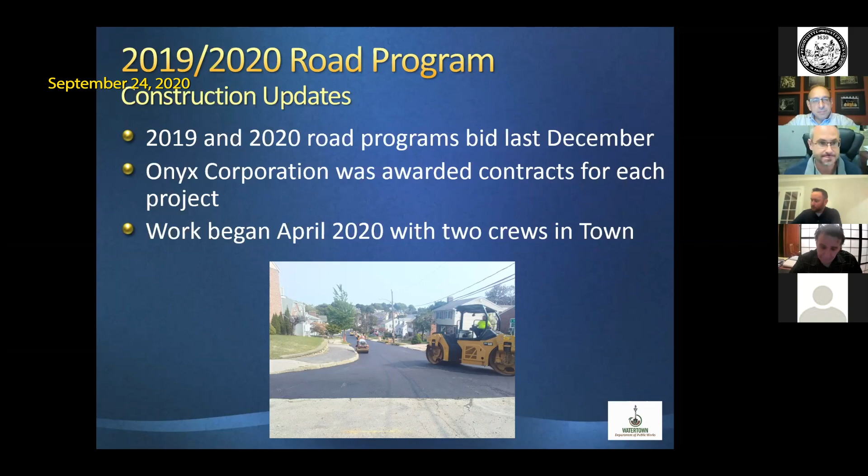Work began in the middle of the fray in April when everything was a little hectic, but they have had two crews in town working consistently since then. I'm going to go through just a brief update. I won't go through every street individually, but I've listed here the streets that are completed: Avon Road, Chandler Street, Burnham Street, Bridgham Ave, Piermont Street, Tappan Ave, and Bartlett Street. I do want to point out that even though I'm saying they're completed, you should consider them, say, 99% complete, or essentially substantially complete.

There are items that still need to get done. There will be some line painting that goes in, say, stop bars or crosswalks. Tree plantings will be done in the fall. And there might be, as there are on any project, some items that maybe fell through the cracks or didn't get addressed. So the town will go through with the contractor, walk the sites, and look at any deficiencies or defects that need to be addressed, which is called a punch list. But essentially, these streets have been completed to date.

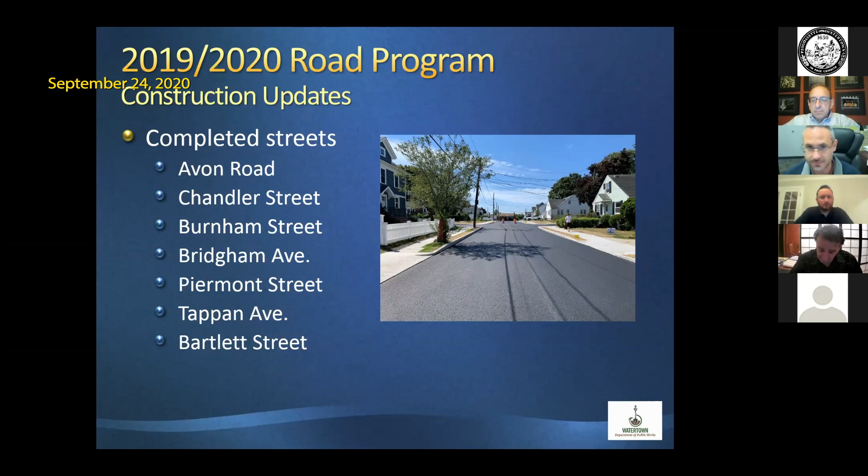We have two streets going on concurrently right now with our two crews. We have Bellevue Road going on and Kimball Road going on as well. They both have curb and sidewalks going in at the same time.

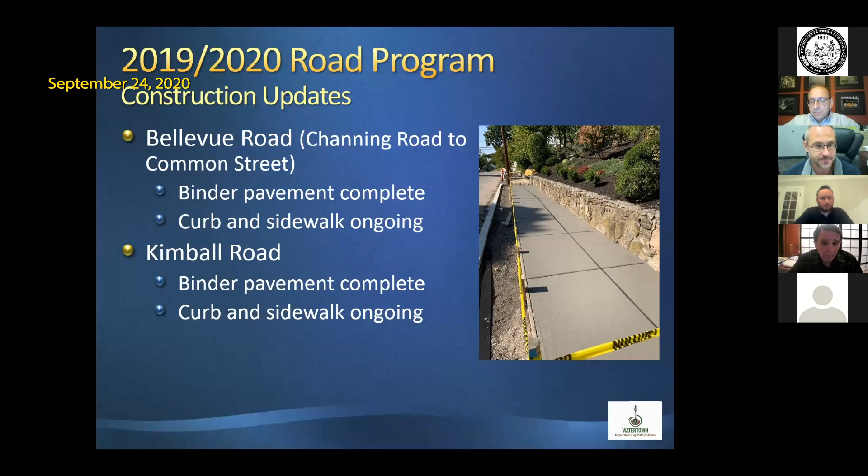The roads that you've probably recently seen have been brought to binder grade. They've had the reclamation process done and put in the first coat of asphalt are Frank and Louise Street, Nichols Ave, and Downey Street. I'm being very conservative in what I'm putting out here because I don't want to make promises that don't happen, but I will say that the contractor is very interested in getting all of these streets completed this year.

That said, we are entering into October. We've had an unseasonably dry season, which has allowed us to continue to work. If we have issues with rain, weather delays, and other things, they may not be able to get to all of these streets. Right now, the next street they plan on going to is Frank and Louise Street. They'll probably be there probably second, third week of October as one of the crews finishes up on Kimball and Bellevue.

When the next crew finishes up, we'll evaluate how much time we have left and decide whether to go to Nichols Ave or Downey Street. Nichols Ave is a little bit more intensive, a longer street with more work to do. Provided we continue to have good weather and a mild fall, they plan to keep going as long as they can, and there's the potential for Downey Street to get completed this year.

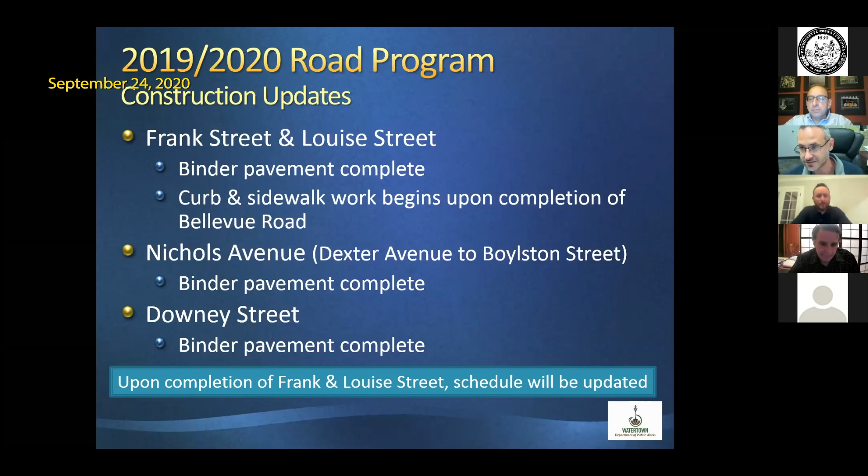Also, the council may be aware that on a weekly basis we've been updating the homepage of our DPW webpage with a little bit more detailed information about the work that's going to go forward. And of course that supplements any resident notifications that go out per our typical process.

Wheeler Lane, we've had a little bit of a delay with Wheeler Lane this year. We got into a rather complicated gas main project on Riverside Street and Wheeler Lane that have impacted some sewer work and our ability to proceed. But the contractor is still willing and interested in doing Wheeler Lane. It will be done in the spring, and this is consistent with the past couple of years where we start a project with multiple streets and sometimes carry over to the next year to finish up.

I'd like to take this opportunity to highlight some of the work that we do, and particularly how it ties in with some of the other town council priorities and objectives. So I'm going to talk a little bit about green streets and complete streets.

Some of you are familiar with our green streets from our Edenfield Ave project a couple of years ago. That was fairly successful in terms of managing stormwater and providing enhanced stormwater quality improvements, reducing the amount of stormwater in our systems through stormwater tree trenches. I don't have the final installed picture here, but you can see on the right a picture of a tree trench being installed. You'll see the concrete structure being the catch basin, and the little white pipe with holes in it, surrounded by crushed stone, is the pipe that allows the water to percolate into the soil.

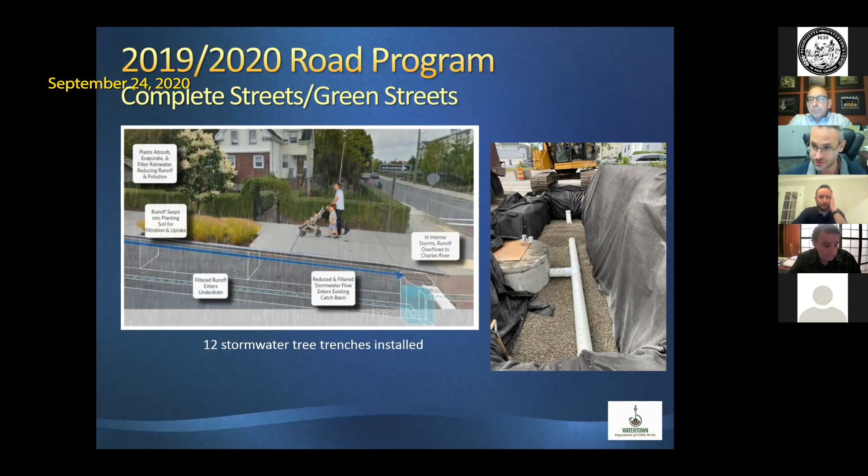Along those lines, in terms of complete streets and green streets, I wanted to point out something we've been doing over the past couple of years in terms of working around trees when we need to. As you can see on the left, we try to avoid impacts to trees wherever possible. In these instances, we actually did almost a reverse bump out where we reversed the sidewalk around the tree, as opposed to being behind the tree where we'd have more impacts. It provides for a continuous sidewalk while also protecting the trees.

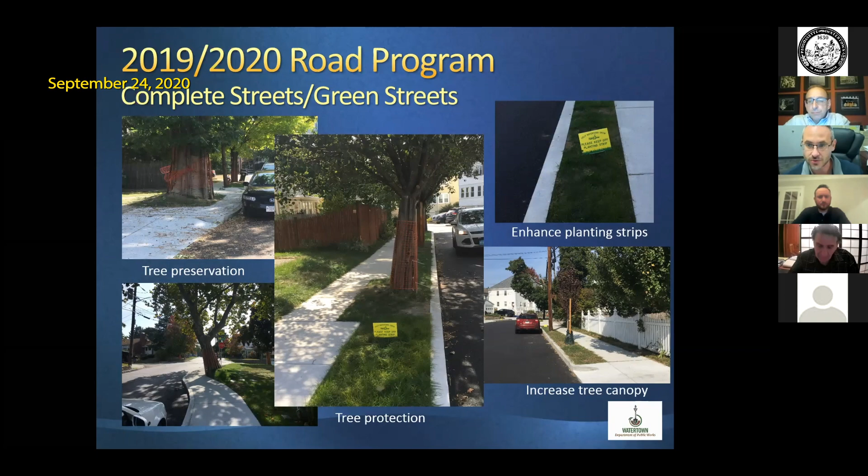Tree protection always comes up during our projects, and you can see in the middle we have our tree protection on our tree. We've also pulled back the sidewalk a little bit while maintaining our ADA requirements to give the tree a little bit more breathing room. And on the right we have our tree canopy. We're not finished with tree plantings on our '19 and '20 road program; those will be included in some of the tree plantings this fall. And of course the planting strips, as you see in a lot of before and after pictures where we've had paved borders or no curb to offer protection for pedestrians, we are adding those in.

And then further, kind of the kitchen sink here, ADA compliance, making sure that we're aware of resident needs for ADA impacts, as well as ADA compliant sidewalks, handicap ramps, filling in the gaps in the network. Many streets that we have been doing over the past couple of years don't have complete sidewalks or lack sidewalks completely or have gaps, and we attempt to fill those in.

And then on the left, you can see this is the intersection of Burnham and Chandler. We've pulled the intersection in a little bit to tighten it up. That allows us to have better pedestrian accommodations in terms of having shorter crossing distances. Also allows us a little more green space and reduces impervious area.

So, I apologize for blowing through this quickly, and I'm happy to take questions as they go along or at the end. But I'm going to transition now and discuss our pavement management goals, what we look at when developing our road program, and some of the other methods we use for pavement preservation. Then we'll get into the recommendations.

Every year, we try and take a holistic view of pavement preservation so that we're not just coming to council with roads in the poorest shape. We're also looking at roads that need maintenance, and we're doing preventative maintenance on roads as we go. We're also looking ahead towards utility needs, working with the gas company every year, working with our utility division to make sure water, sewer, and drainage improvements are done prior to paving a street, so that we hopefully don't have to go back and dig it up afterwards.

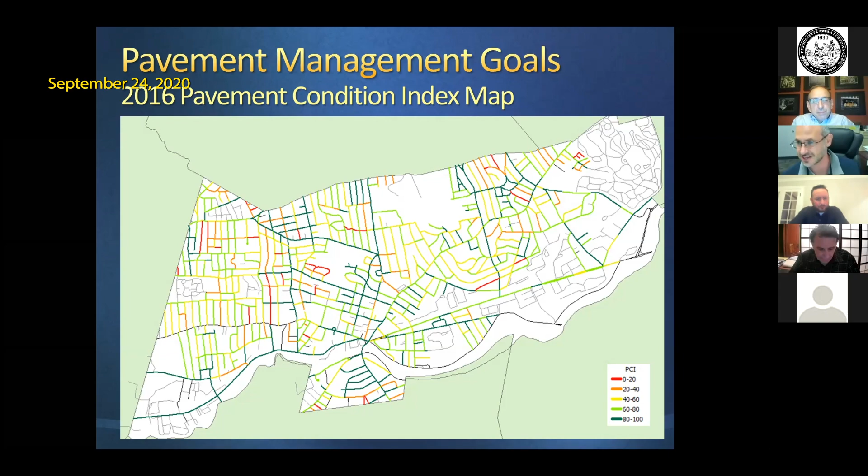Getting into pavement preservation versus road reconstruction, we use a variety of pavement preservation techniques that the council is made aware of during the course of the year when the work begins. In terms of limited mill and overlay repairs, the superintendent likes to call that our 300 to 500 foot section work, where we're not necessarily looking at a complete street or complete road rehabilitation, but taking the worst sections of a road and trying to bring them up into better shape so we can preserve and prolong the life before it needs a full reconstruction.

Same thing with full depth patch - we go around town and look at sunken trenches, areas that might have had work done, where we have significant potholes over time, and we do permanent patch. Again, that's to lift the overall state of the road to prevent it having to have full reconstruction. And then crack sealing, which to be honest we have not done a lot of in the past couple of years, but that's your first line of attack - when you have cracks, fill them in to prevent water from getting into the roadway surface and causing further deterioration.

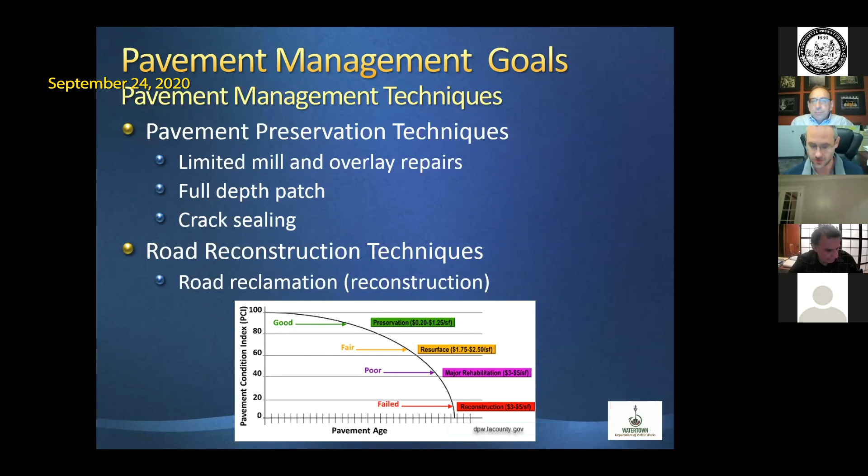Now, of course, the reason why most of us are here today is to talk about our full reconstruction program, which is reclamation—basically digging up the road, what we call pulverizing it, grinding it up, getting a new base, putting a whole new set of asphalt down, along with curb and sidewalks.

I just want to point out, because the questions do come up—I know council hears from constituents, and certainly DPW from residents—of, well, you did X, why didn't you do Y and Z? Or you're out there doing a patch, well why aren't you doing down the street? Or why aren't you doing the sidewalk? Or a litany of other things.

I want to reiterate, and I know it's difficult for folks to understand, that when we're using preservation techniques, we are very limited in the scope of work. If we're doing a mill and overlay, we're looking to mill and overlay the road. A permanent patch is a permanent patch. There are definitive scopes and definitive limits. It's not something where we necessarily go in and do all of the curb and sidewalk and other items that we may do during a full reconstruction.

So again, this is just another summary. I've already discussed the pavement management techniques. I do want to let you know there is a link at the bottom of the slide that gives you a little bit more information on the highway department website about what some of these methods are and when we use them.

Road reconstruction. As I mentioned, talking with Cambridge about some projects they do, they call mill and overlay a facelift. So road reconstruction is not a facelift, it's reconstructive surgery, I suppose. This is a process where we are putting in a full 4 inches of asphalt versus, say, 1.5 inches that we'd be putting in on a mill and overlay.

We'd be putting in a new base. Underneath that pavement, you need to have good compacted gravel to make sure that the road can take the weight of the traffic above it.

So we're addressing that. And in accordance with the town council policies, rules, and ordinances, we install granite curbing, concrete sidewalks, driveway aprons, and handicap ramps. We often are adding in a planting strip if it's not there or if it's paved over. We review driveway openings for compliance with zoning, meaning we walk the streets with the zoning enforcement agent and they make decisions as to how driveway openings should be handled.

And as I discussed with our tree trenches, we do look at stormwater management, nutrient control, meeting other goals, and trying to tie in a complete street when we're doing a full reconstruction. And for the reason we're sitting here today, we do provide the council a recommendation of lists that the subcommittee then reviews and hopefully recommends to the council for full review and approval.

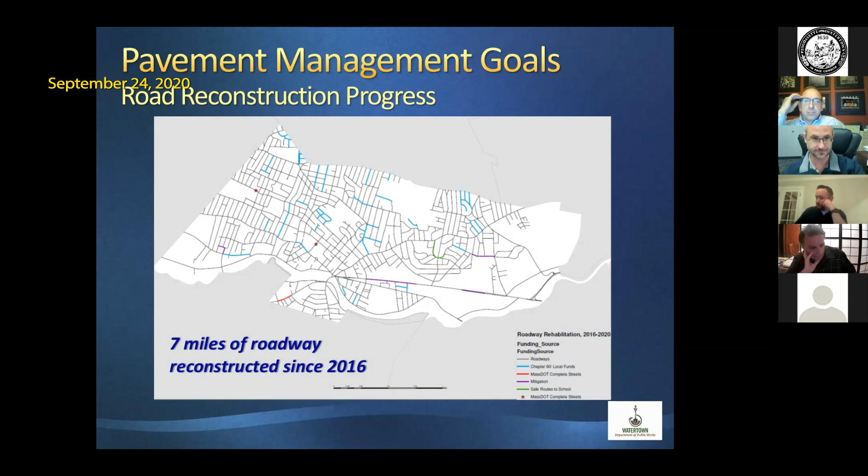So how do we develop the list that we are coming to you today to recommend? As we discussed before, we have a pavement management plan and a pavement management inventory.

We have a general sense of what's a 0 and what's a 100 in town. That definitely gives us a good starting point. We do windshield surveys year round, and particularly after the winter, to see how the roads have fared over the past year, and whether some roads seem to deteriorate faster than others. We tie into our capital projects and make sure that we're not proposing to do a street that our water department's going to want to do a water main on, or likewise that the gas company is going to say they need to do a gas main on.

No one believes me when I say it, but I say it every year: we do consider resident input. That gives us a heads up of areas to look at. The roads are the roads, and we need to be objective among the 72 plus or minus miles of road. But when we get resident input, we do look, and it may not be that a road needs full reconstruction, but we may say it needs a permanent patch, or there's a section that needs a mill and overlay. Those things are definitely considered as we go along.

Again, things I say every year: the roads are the roads. The greatest state of disrepair are the roads in the greatest state of disrepair, and that dictates to an extent what the program is. We always look at our funding constraints. The town council has generously been funding us - I've been here for 6 years and I know it's been longer than that, and we've made a lot of progress - but we select a program that meets within those constraints. We're looking at our funding sources, where we can do preventative maintenance with a little bit of geographic equity. We want to make sure the whole town is being addressed and that we're not just focusing on one area.

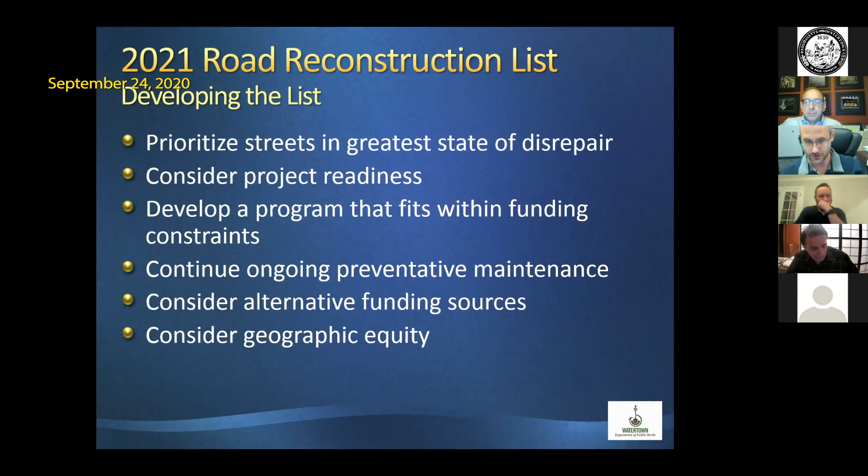As we develop this year's program, looking at some of the work performed, I have our water main replacement program that will be wrapping up in the next couple of weeks. I also like to provide the footage or miles of National Grid streets that were reconstructed or rehabilitated. I didn't get to do that this year, but I've listed a short list - I think there are even more. National Grid has been an excellent partner working with us on looking at what our needs are, future needs, and their needs, with a cooperative effort to make sure infrastructure is upgraded before we go in and do any road programs.

With all that said, I'll present our list, and as I do every year, I'll provide a little more background as to why we chose these streets as we move forward.

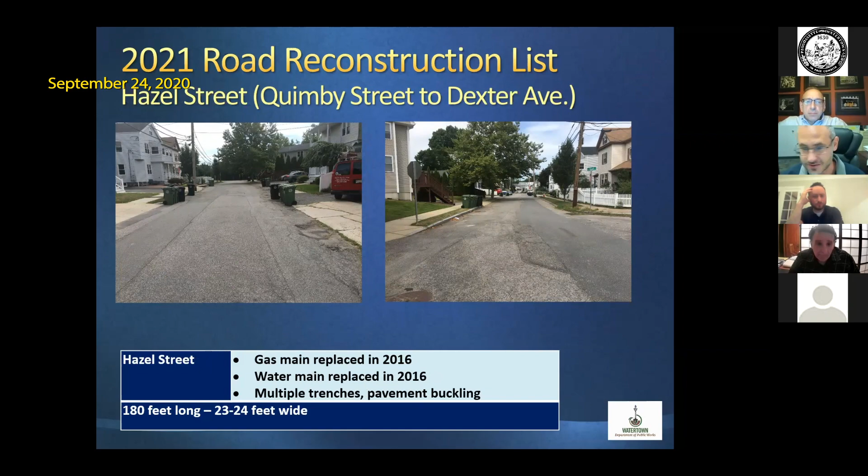Goldie Street, somewhat similar situation. Back when Waverley Ave was done in 2011, the water main was also replaced at that time. The gas main was replaced in 2017.

Elmwood Ave, very similar to Gertrude Street, where on the right you can see the macadam sort of sticking through where it's been patched. Another relatively wide street that had the gas main replaced in 2017.

Grandview Ave, this is the section between Chapman Street and Copeland Street, sort of behind the Cunniff School. You can see on the left side the gas main patch where the gas main was replaced. I want to point out that the desire is to provide a continuous sidewalk on both sides, given the proximity to the school. However, that does need further analysis.

This is a great time to be replacing the street—that's not lost on us, with the Cunniff School not occupied right now due to construction. I also reached out to Tom Finnegan, who is the construction owner's project manager for the town, to get his input on whether we'd be interfering with the Cunniff project if we did a project on the back of Grandview Ave. He said that based on their access, there wouldn't be an issue. And when we get to construction, we would keep them in the loop to make sure we don't have any issues going forward.

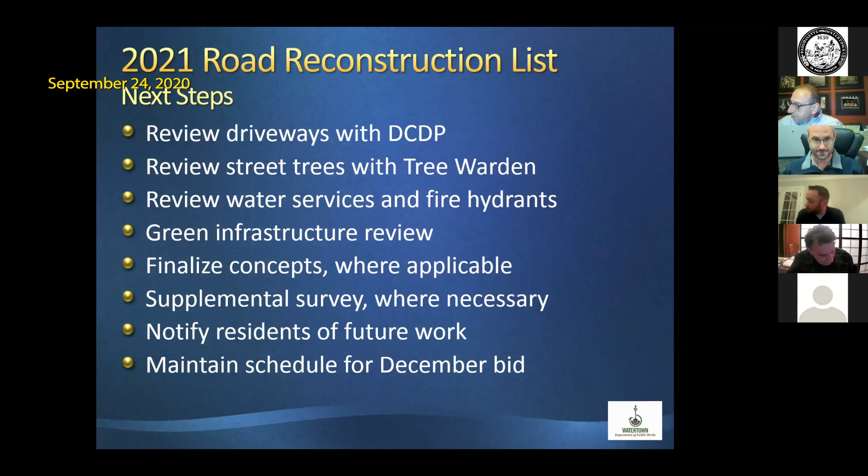I do want to give you an update on our Long Streets and Collector program. As you know, in FY19 the town council appropriated $1.5 million supplemental for Long Streets and Collector programs. Subsequently, last year we came forward to the council and recommended Waverley Ave as the first street in this program, which the council approved. We are a little behind—I admit COVID got in the way of going as quickly as we wanted to. In addition to the council approving it, this was in our Complete Streets prioritization plan.

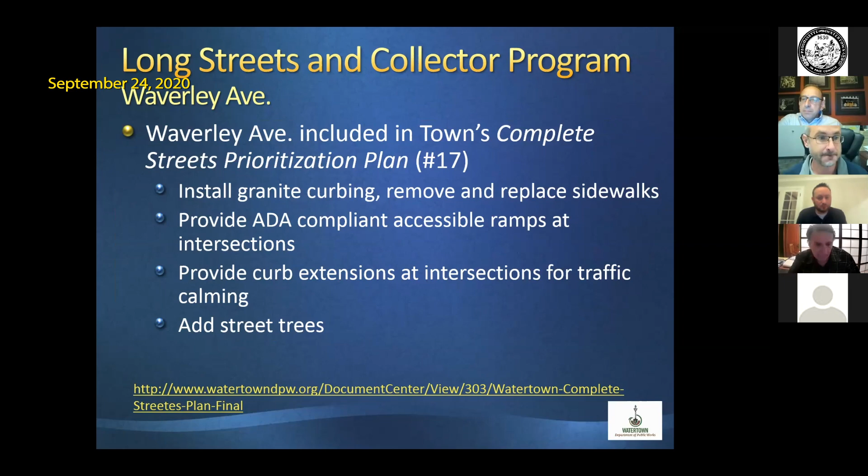You can see what the scope was at that time, and I've included a link to the full plan at the bottom if folks want to take a look at it. We've made some progress, not as much as we'd like, but we did complete a land survey earlier. We reviewed the driveways with zoning enforcement, although given how early on in the project we are, we have not made any notifications yet.

We've looked at some roadway alternatives to see what a road cross section would look like. We have about 8 water services that are substandard, meaning the town standard is now 1-inch copper. If a service is iron or 3/4 inch copper, we'll typically upgrade it prior to doing the road, to make sure we don't have to dig the road up afterwards. That work will be completed this fall to get ahead of the schedule next year.

Our next steps will be to develop a concept plan for review by the Complete Streets Working Group, and we'll look to be in substantial conformance with the Complete Streets prioritization plan. We'll do our typical abutter notifications, get plans together, and look to bid in winter for construction next year. I had a conversation with our consultant, and I expect we'll be able to do this in line with December, like we did this past year, but I'll say winter to give a little extra time. If we go into January, I don't think that will affect the number of bids or bid prices, but the goal is to try and do it in December.

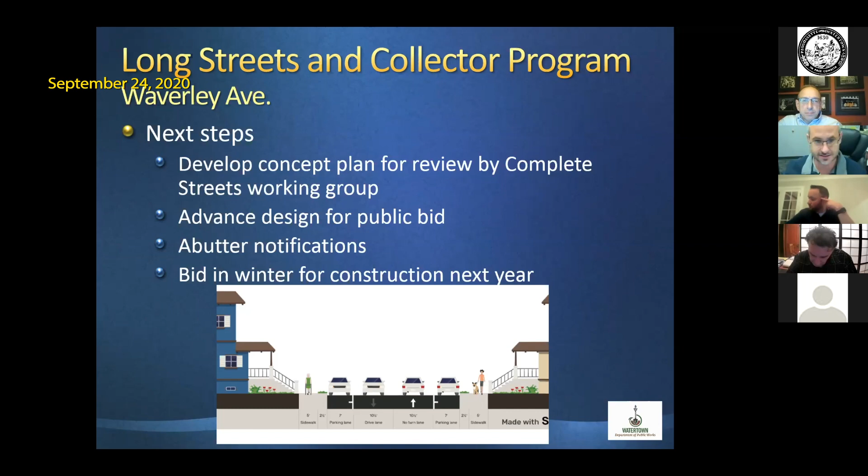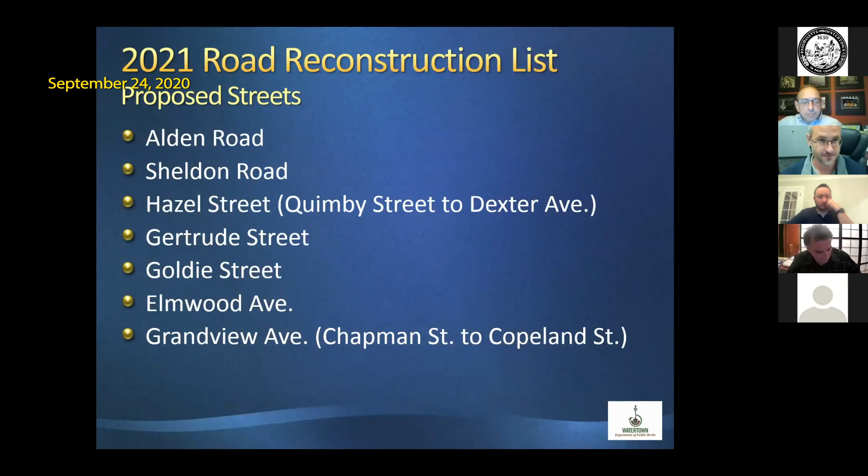I would like to provide our summary of recommendations to the Town Council Subcommittee for the 2021 road program. I know the committee likes to see them geographically sometimes, so I've also provided them on this slide geographically. There's another slide after that says questions, but I'll go back to this because I'm sure folks will have them. I can stop sharing my screen, I guess.

Matt, there was just one other document you had given us, the memo about the sidewalk and street maintenance work that was done. Yes, Councilor, I don't have that on my screen set up. I can try and find it if you'd like. Yeah, I could share that, I have it open on my screen. I just wanted it because this comes up every year - what do we do for the other, like the 300-foot mill and overlay stuff? Do you want to cover that now? Does the committee want to hear that now before we go on to questions and discussion, just so we have everything in one place? I think that makes sense. So do I stop sharing? If you stop sharing it, then I can share it and show that.

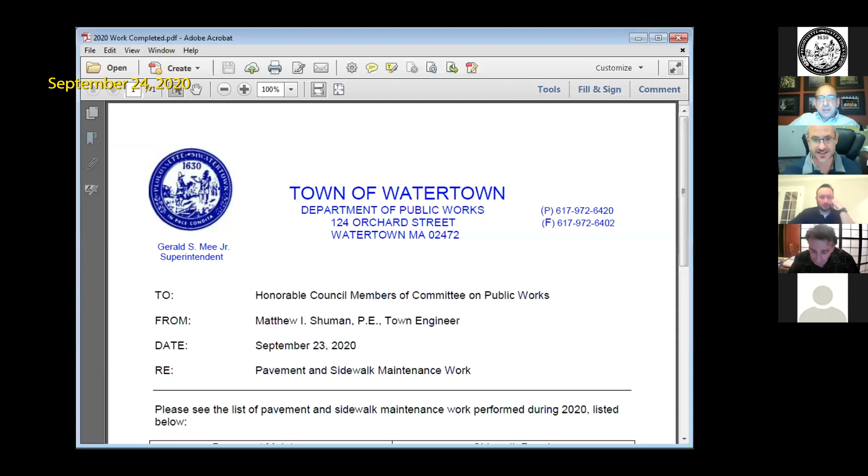Can people see that? It says yes. All right, so can everybody see that? This was sort of what's been done this past year, so I'll leave that there. And Matt, if you just want to talk to that.

Sure, so on the left is our list of pavement maintenance, as I was talking about in terms of rehabilitation and preservation. We have our crack sealing, our trench patch, and our mill and overlay. I didn't give you an exhaustive list of each repair, but this is the main crux of the work, our mill and overlay maintenance. It gives you a good idea - I think we made pretty good progress on our mill and overlay contract this year.

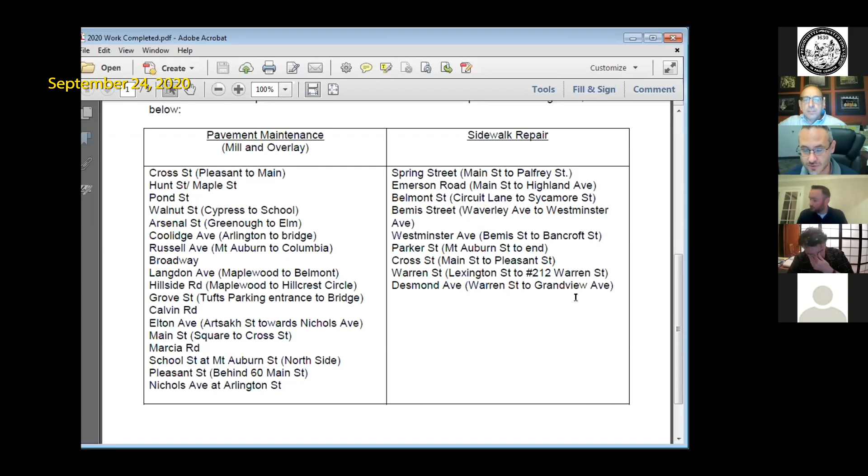We also hit some of those residential streets, where doing a pavement preservation helps extend the life of the road versus having it reduce down to a road reconstruction project. And then on the right, just a list of our sidewalk repair - again, we had a little bit of luck getting our sidewalk contractor into town this year.

We made pretty good efforts, and again we were able to focus on some of the main thoroughfares, Belmont Street near Circuit Lane, Spring Street were some areas. And in some instances on larger streets, what we're trying to do, in line with our complete streets policy, is if we're doing a road rehabilitation, a mill and overlay, also look to do sidewalk work.

For example, Cross Street, we did sidewalk rehabilitation and also a mill and overlay. Spring Street, we did a sidewalk repair from Main Street to Palfrey Street, but most of the work was actually from Summer Street to Palfrey Street. The idea is that eventually we can go in and mill and overlay that section of Spring Street, as it is in quite a state of disrepair but is eligible for a mill and overlay.

So I hope that provides some context for that list, and I'm happy to answer any questions.

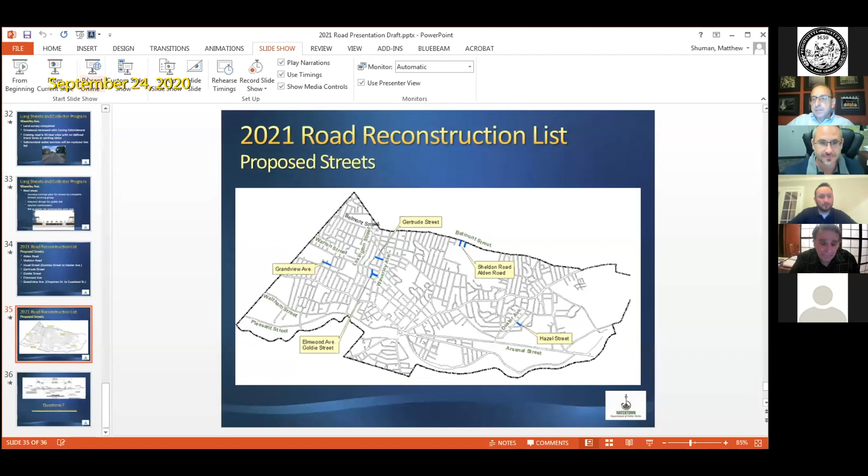So every year when we present our road program to the Public Works Subcommittee, you'll see we list the length and width of the street. Here we have Elmwood Ave, 33 feet. Grandview Ave, 23 feet 6 inches. Obviously that's plus or minus a couple inches, but I did go out and review these road widths. There's a lot of confusion sometimes with residents—the curb makes the road look a lot narrower than it is. So when I say the road's 23 feet 6 inches wide, or 33 feet wide, typically we'll be matching the current width.

Now, the town policy—if you go into the curb and sidewalk ordinance for a residential street—typically 24 feet is the typical road width. That accounts for a 10-foot travel lane and two 7-foot parking lanes. Councilor Piccirilli I think helped write the ordinance, so he knows a lot more of the background. But that's been established and reviewed by the subcommittee several times, and it's also worked with police and fire.

You mentioned Edenfield Ave. That was a slightly different type of project where we did a roadway narrowing, and we did have a public process. The road was narrowed—I want to say it was about 32 feet wide before, narrowed down to 26 feet wide. Still wider than a typical 24-foot wide road, but certainly narrower than what folks were used to having lived on the street. Again, there was a public process, and it was reviewed with police and fire, as are every street.

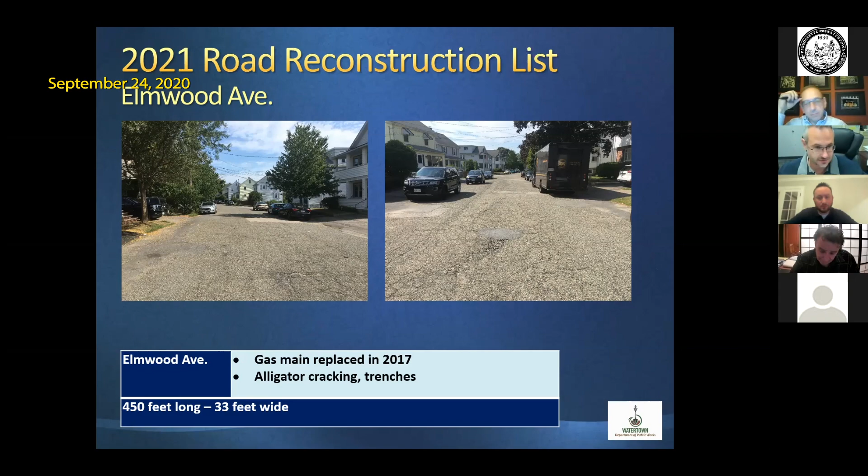We do sometimes get questions, and I want to point out Piermont Street was 24 feet wide before. If you look back at our previous presentations, you'll see it was noted as 24 feet wide. Sometimes you'll see 23 feet 6 inches—our goal is to get a 24-foot wide road. If we're able to widen it a little bit, we'll try, but as you can see here on the right, trees in the way, it might not be possible.

Depending on the street, we use a little bit of judgment, and we'll work with the transportation planner to see if any parking restrictions might be required. We also look for resident feedback on that. Parking is a touchy issue in town—there's a lot of demand for it. We don't want to take away parking, but we also want to be respectful of police and fire needs, plow needs, and everyone's needs to get up and down the road.

So that's something that we look at when it's less than 24 foot wide, on a case by case basis.

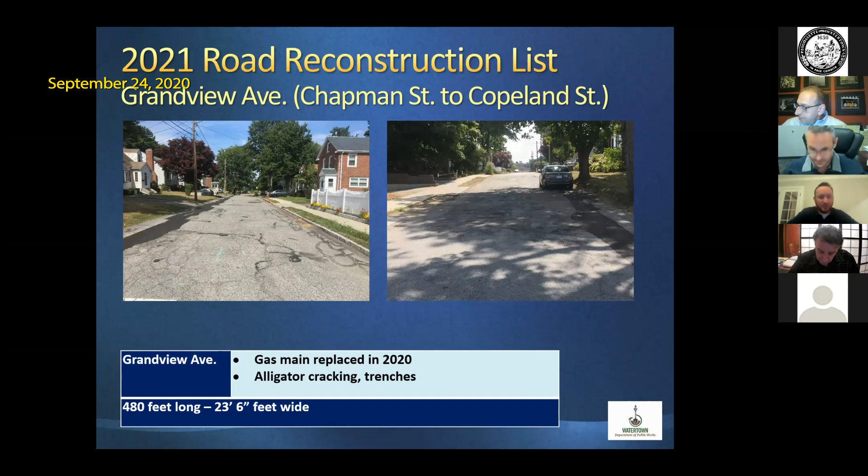I think it's also important for residents to know that although the ideal is to reconstruct the street and put sidewalks in on both sides, that may not always be the case. I'm also thinking about when we redid Everett Ave, and in certain areas we couldn't put in sidewalks. So I just think it's good to assure residents that we're not just going to force the full width sidewalk on them if the street can't accommodate it.

Thank you, I agree with that. In our resident notification letters, we do try and come up with a concept showing whether there will or won't be a sidewalk. But sometimes we get out there and didn't think we could put one in, and then during construction realize, hey, maybe we can, like you saw on some of the earlier pictures for Everett or Chandler Street. We went around in front of trees instead of not having a sidewalk or having to go behind trees and have impacts. So there's a little give and take, but we try to give folks as much information as we can beforehand. We started doing notification letters around 2017 or 18, and that's also a learning process for us, as we try to provide as accurate information as possible.

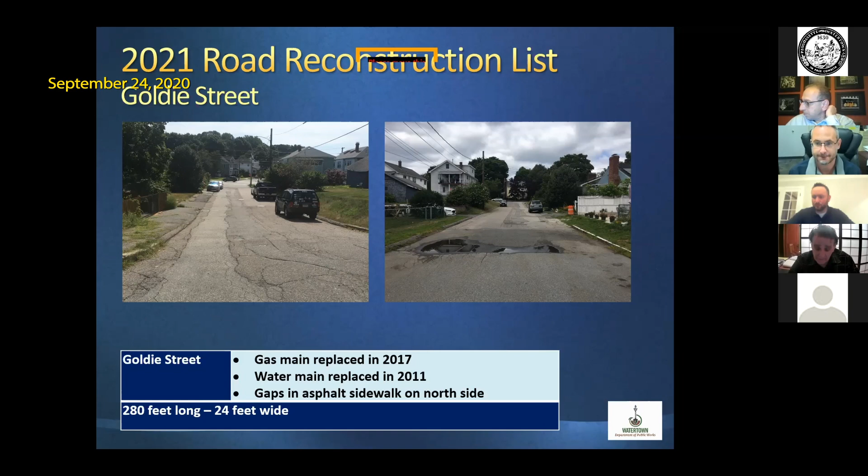And then I had a question about Walnut Street. People were kind of surprised - I thought more improvements were coming because of Athena Health on Walnut. Could you explain a little bit - is that on a complete streets path, or potential bike lane, or? I'm not entirely sure which, there are a couple of projects on Walnut Street, I can't speak to all of them. I know Athena had presented improvements at the intersection of Walnut, School, and Dexter.

Unfortunately, I can't give you an update on that - I could certainly check in with Mr. Magoon on the status. You're also aware of the development at Doble, 85 Walnut Street - they had committed to a number of improvements on Walnut Street in terms of bump outs and pedestrian improvements, I believe at Lincoln Street, the existing park, and at Cypress Street. Again, I can't speak to all the details. I understand the project was approved, but I don't have information on the timeline of their construction. The section of Walnut Street that we milled and overlaid is outside of all those work areas, so that's something we considered when looking at the work limits. But I'd recommend checking in with the planning department to see what the status is of those two projects.

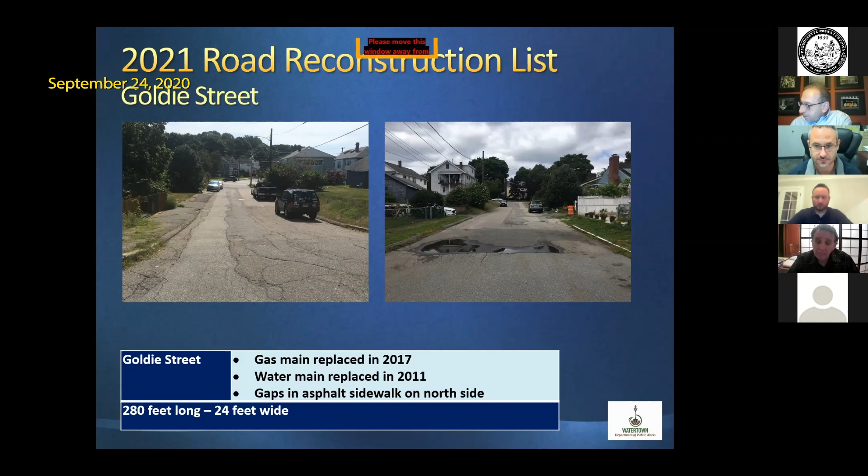Okay, thank you, I really appreciate it. I know with Spruce Street, the crumbling asphalt curbs and whatnot, people were wondering - I know you don't have a lot of info, but could you remind me, I know there was concern on Russell Ave. Was there an alternative to granite curbing installed? Was that green strip taken care of near Mount Auburn Street, at the corner near Broadway? I actually have a photo.

My mill and overlay photo is from... this is the tricky thing for us as Public Works. We have a mill and overlay contract, and we have berm that was put in a while ago. It's very difficult to maintain and repair. I definitely feel the residents' pain, but as we committed to, we did loam seed the border. We also put down 'do not park on the border' signage - I know the resident was very concerned about parking on the border. This comes to DPW and also councilors in terms of border maintenance. Working with the park supervisor, we're looking to get a hydro seeder so that when we do loam and seed border repairs, we're also able to hydro seed them to help establish the grass and prevent erosion, particularly on our slopes where erosion happens after the soil's bare.

Oh, great, that's good to hear that you're looking for that. I know the signs - we don't really have any instructions for residents about the signs, whether they could be recycled with DPW or what.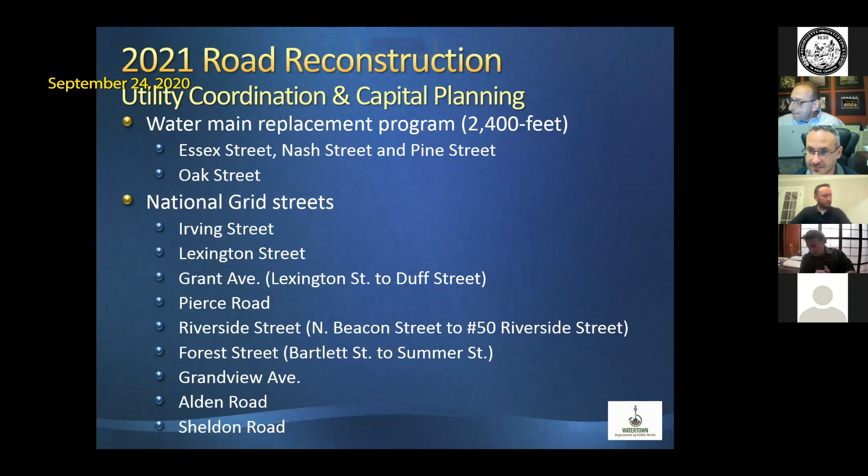It's great to see, I think you called them stormwater trenches, 12 installed. I don't know if it's on the DPW website, I'd be curious to know where they are. You don't have to tell me now if we can find them.

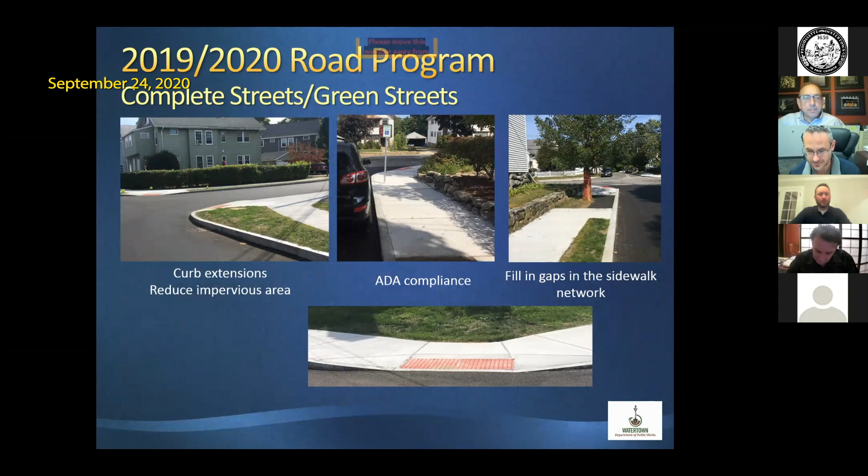I don't have them listed on the website, but if you go onto the website under stormwater management, there are tabs at the bottom that discuss what a catch basin is, what an outfall is. We did add something for green infrastructure, and there is some information there.

I can tell you of the 12, I'm just flipping through the slides, but there were, I think, 4 or 5 on Frank and Louise Street, 5 or 6 on Piermont Street, 1 on Chandler Street, 1 on Burnham Street at Mangano Court, and 1 on Loomis Street at Downey.

So there's a whole separate investigation. The soils need to be conducive to having them. As part of our investigations in terms of green infrastructure, we'll dig into the soil and figure out where they'll work. We'll look at utilities. For example, Kimball Road looked great, then we dug a hole and there was ledge, so we couldn't put one in. A lot goes into it, but where we're choosing streets that are conducive to it, I think we're making good progress.

I know our planting strip costs for those improvements, are they rolled into the sidewalk repair program, or is that something we'll learn from the tree warden? I get a lot of questions about bump outs where there's just grass, and people ask couldn't we have perennials or shrubs or a tree. On the website there's the Watertown guide to the planting strip, which has some recommendations on what can and can't be planted, but those are the ones DPW has managed, versus a homeowner's own planting strip, like the new ones installed.

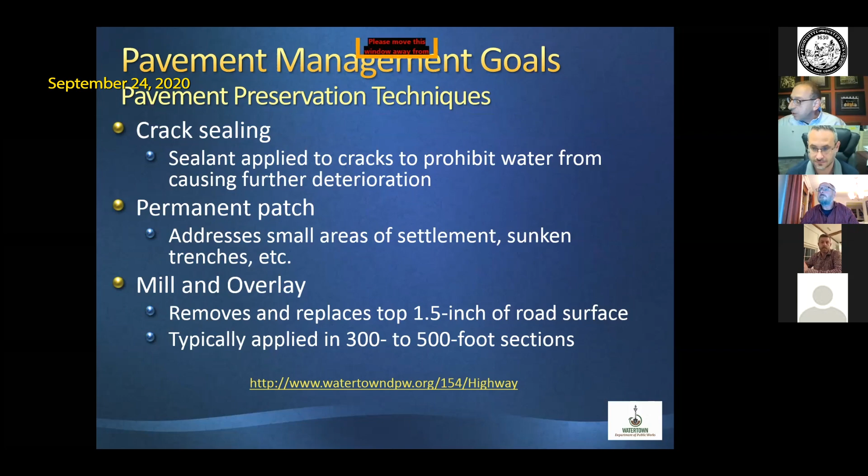And just so people know, the only thing we're making a recommendation on tonight is the 2021 road program, which is the seven streets: Alden, Sheldon, Hazel, Gertrude, Goldie, Elmwood, and Grandview. So this was not a posted meeting to discuss the design of Waverly Avenue. That was only included in the presentation as a status update about where the design process is. So, all right. Thanks, Vinny. Thank you. Sure.

Maria. Unmute and start video. Good evening, everyone. How are you? It's good to see everyone and everybody looking so healthy. Can you hear me okay? Yep, sounds great.

Thank you, Vinny, for clarifying about Waverly Ave, because that immediately raised concerns.

As you know, we're doing the bike ped plan, and one of the things identified as a major hole is alternative ways of commuting and moving around town on north-south roads. Waverly is a perfect north-south road because it goes all the way from the river into Belmont, tying into White Street and Trapelo Road and Belmont roads, which are major east-west arterials for cyclists. So we really need to take a close look as we get closer to the design of Waverly, what we're going to do.

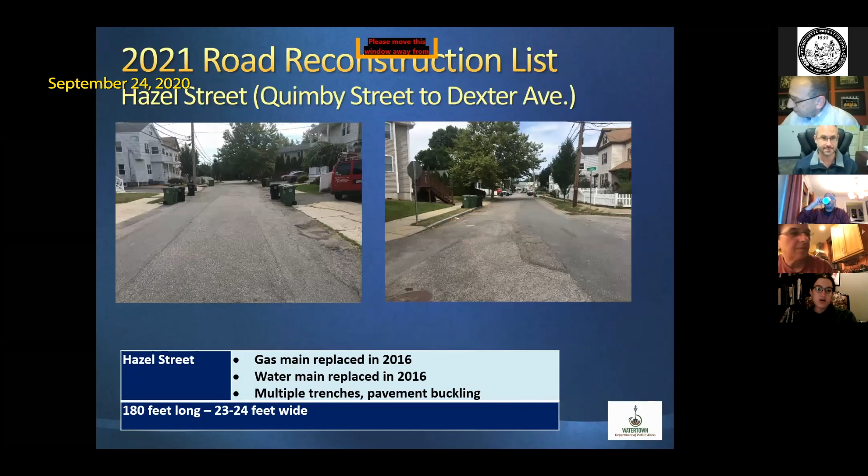Mostly I just wanted to put in a general plea for curbs. I know the planning department, in a conversation with them this spring, said they're really trying to get curbs included in new projects, but I haven't seen that in all the projects that went in this summer. For instance, I think Marcia Road, which was quite nicely redone, didn't get curbs. So I just wanted to put in a plea for them in general. There are a number of places where the sidewalks are not great, but okay, except you can't walk on them because house after house after house has cars parked on them, except for maybe a foot. So essentially that's my comment — I really want to put in a plea, and also for it to be really hefty curbs. I know the granite ones are expensive, but they really do make a difference in terms of people parking on them or not.

Thank you, I do appreciate that comment, and it goes back to looking at the road surface as pavement preservation versus full reconstruction. Some streets that get mill-and-overlay, we're not necessarily putting in curb. All the roads the town council will be approving as part of a road reconstruction project will include granite curbing and concrete sidewalks. But as we look at maintenance activities, our maintenance activities are more limited.

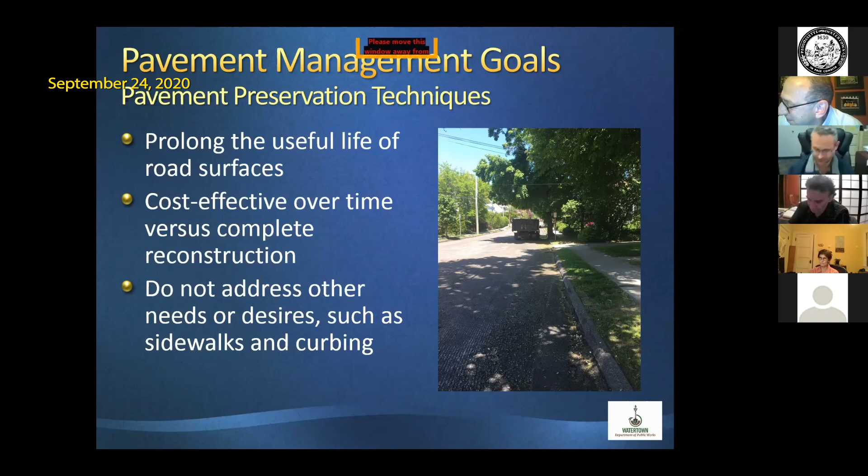My question has to do with Alden Road, because I actually happen to live on that road now. Matt, my question is, why? Because really, in all honesty, it's okay, it's not in great shape, but there's a lot of other roads in town that need more work. Personally, maybe it's just me, I could live with it like this. Maybe it's a question of it deteriorating worse, but on a scale of things, I personally, as a resident, would say we could live a few more years without having it redone.

I appreciate that feedback, and certainly I'm sure the subcommittee and council can consider that in terms of evaluating the recommendations. Okay, thanks Sheila, great to hear from you.

All right, so Lisa, back to you. Thank you so much. As a follow-up, I have Alden Road residents who have been upset for years that it has not received attention since it was identified years ago as needing reconstruction, over 5 years ago.

My one question I get a lot is, we don't seem to have a plan, or is there a plan for roads getting washed away from stormwater, a lot of degradation, and we don't have curbs there, such as Bailey and parts of Russell, and up there off of Oakley Country Club in particular, there's a lot of washing out and crumbling, so I don't know if you can speak to that. I know that's not part of the potential vote or recommendation tonight, but I really appreciate you taking all these extra questions around roads and sidewalks.

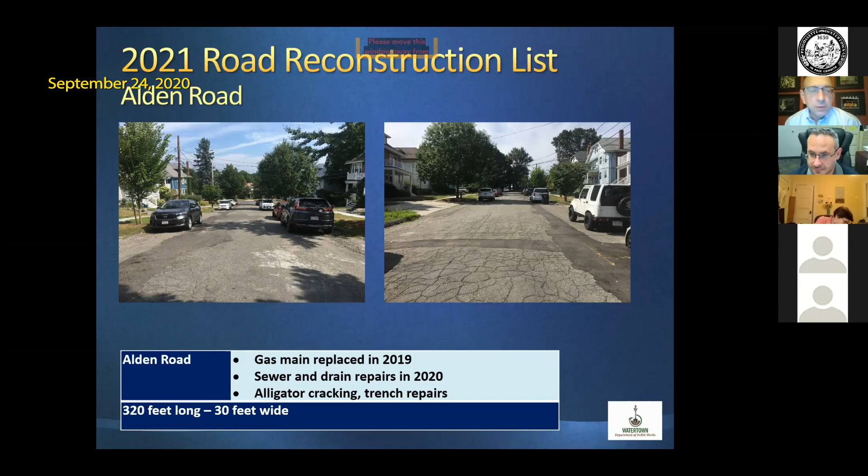So we have a final product. And then just the last question, Vinny - I forget actually what we passed in this last town council budget, but did we have an additional 1.5 million for long roads, or did we not include that this past year? Yes, we did. So that's for the Waverly Avenue extension, which authorized them to actually go ahead and start doing the design work.

Okay, that's all I have. Thank you. So, and if I could just close up, we're going to make a motion in just one moment, but I just, for the people listening...

Just to go back, we kicked off this new road project for the town council in 2009. Prior to 2009, the town of Watertown did not borrow any money for road construction. And we did not do any sidewalk repairs or curb repairs as part of the road projects. All we did was use our Chapter 90 money to do mill and overlays. That was it. No borrowing of money.

And starting in 2009, two things happened. We issued a policy that all reconstructions of roads, we would repair or replace sidewalks, add curbs if there were no curbs. We wrote the curb and sidewalk ordinance requiring granite curbs and concrete sidewalks for all road reconstruction projects with full depth reconstruction. And we started borrowing - we came up with a plan to borrow $2.5 million a year starting in fiscal year 2009 to do that.

And the first road we did was Palfrey Street. Some of the people on this call may remember what a challenge that was doing Palfrey Street. And it was really just a complete change in attitude - Palfrey Street, for example, was asphalt from front yard to front yard. You couldn't tell where the sidewalk started and where the street began because it was just a sea of asphalt. And it was a lot of social challenge trying to get abutters to realize that there's sidewalks for pedestrians, there's streets for cars.

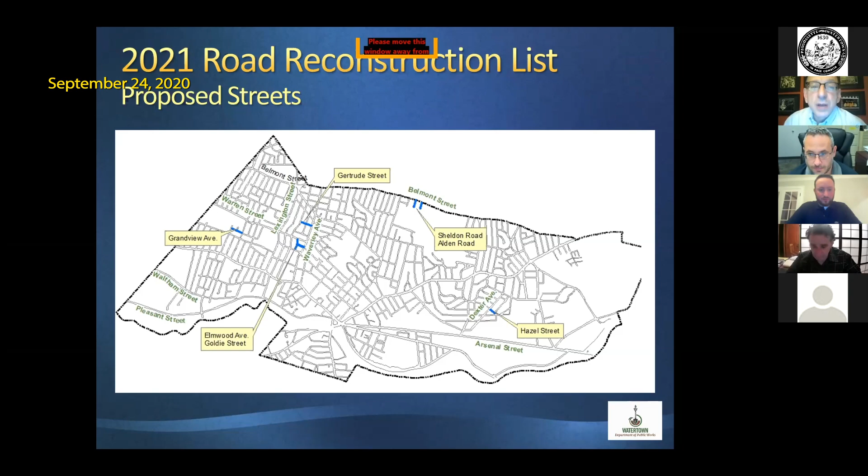So our role tonight is I'd like a motion that this committee recommends to the full town council to approve proceeding with the 2021 road program as presented tonight. So moved. Tony, did you second that? Second, yes. Okay, so that's the motion, we need a roll call vote. All in favor: Councilor Donato, yes. Councilor Palumbo, yes. And myself, yes. So that's unanimous.

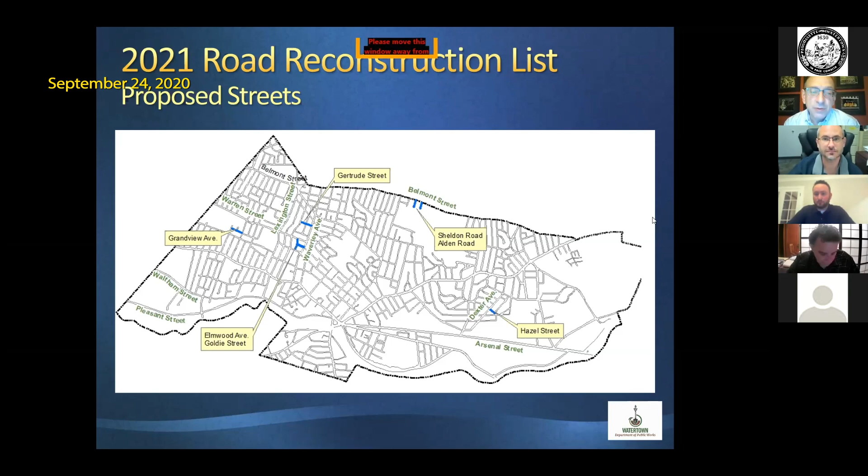Thank you. So that's really it for tonight, Matt. I really want to thank you and Kevin and the others in the DPW for the tremendous amount of work you put into this, I know it's a lot. The next step is this will go into a committee report, and council will vote on it so we can proceed with going out to bid. Our goal is to go out to bid in December so we can get good prices in January, which has been a cost-effective way to proceed.

Any other questions before we adjourn? I just want to point out, I mentioned it in the email I sent out, that the presentation will be posted on our website tomorrow. Okay, excellent, thank you.

Anthony, Tony, you all set? Motion to adjourn? Yep. Second. All in favor? Aye. Aye. Aye. Okay, well that's it. Bye everyone, thank you, bye. It was good, thanks Pat. Thanks Kevin, thanks Laura, thank you everybody. It was good seeing all the rest of you on Zoom. So take care.